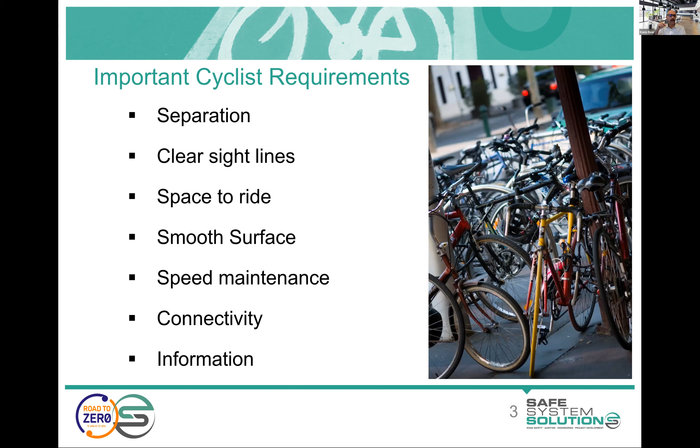Some ways of thinking for cyclists is: we want separation, clear sight lines, space to ride, smooth or consistent surface, speed maintenance - which is an interesting one, I'll elaborate on that a bit - connectivity, and appropriate information.

I like this statement - auditors need to think like cyclists. And as I said, the advantage is a lot of auditors are cyclists, or have been, so that ability isn't too hard. But thinking those questions like: would you feel safe using that road? What about if I turned here, would cars see me? Am I in a door zone if I rode there?

But cyclists, or as a lot of people prefer to be termed, people who ride bikes, come in very varied forms. It's probably the road user group with the most variation - we've got older people who ride, young people who ride, the lycra-clad cyclists, the training cyclists, utility style cyclists, and people carrying cargo on cargo bike style cyclists. It's a very varied group, which makes it quite hard to design infrastructure.

But I sort of resort back to thinking about this 8 to 80-year-old design philosophy you may have heard of. You design your infrastructure for use by an 8-year-old and an 80-year-old, and you really cover the bulk of your community. As I say, for cyclists, sometimes the 8 to 80 doesn't quite work, especially with the lycra-clad training style cyclists, but we'll get into that.

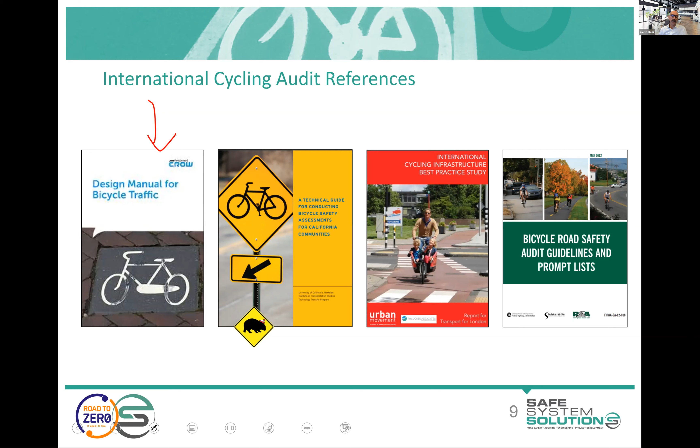And I certainly don't see it in designs anymore. I think the design community is fairly good at this—they design bicycle-friendly grates if they need to do their drainage in this way. So we're in a good position there.

But where I do see it is that a road upgrade is happening and there's existing longitudinal grates with no proposals to alter that, or existing roads and some are still there. We do sometimes see, for example, one that was very clear and important to find in an audit—they were creating pop-up bike lanes, that tactical urbanism approach, and claimed an area for a new cyclist route to connect, using pop-up infrastructure for that. But the new route they took had a longitudinal grate right in there.

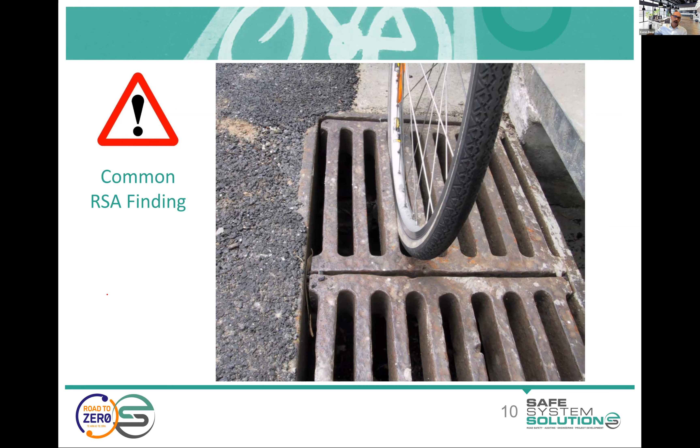So as a road safety audit team, we scratched our heads about this. We said, well, this is wrong—there's no ifs or buts about that, it's just wrong, you shouldn't do that. But then we thought, well, what's the risk? How do we come up with a risk rating on this?

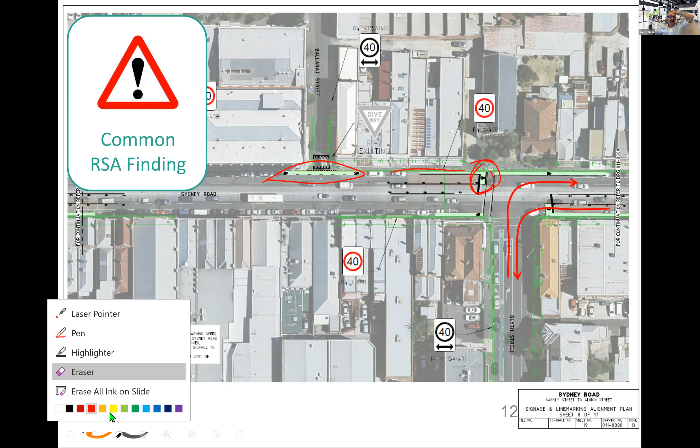I think the idea that somebody would miss a cyclist in that storage box and just plow them down isn't going to happen. I think there's maybe some possibility of drivers doing other maneuvers to get around, like driving around the cyclists there. There's certainly road rage going to happen—absolutely. Can I connect road rage to a road safety incident? Debatable. Anyway, so we ended up rating it at a medium.

In reality, it almost doesn't matter what we rated that—it was going to get changed. But we do like to have a think about that.

Okay, couple of questions that come in there. One's about where are those cycling reference documents? We'll have a look at that and let you know. I might check at the break to see if they're in there, or they need to be uploaded, or they may even just be hidden from you at this stage. Sorry about that if they're not immediately obvious.

How is it intended cyclist right turn from Sydney Road to Blythe Street? Great question, that's often a challenge on how you do that. So in this case, they either would need to navigate their way into the middle of the road to turn right, or cross at some sort of pedestrian facility and make their way there to turn like a car. It's a little bit hard, you'd also potentially put a hook turn facility in there so cyclists could come off and get a free run down there, which is a much nicer way to do it. Yeah, so no stop box for them.

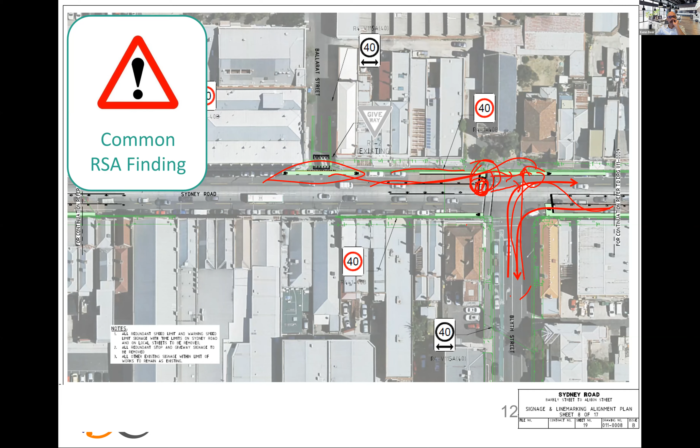In the UK, yes, and it's Wales. So Kez, I'll let you work out prizes on that one. You been to Wales, Kez? Yep, many times. Do you speak Welsh? No. What does that translate to? I haven't got it. Well, obviously, cyclist dismount. Obviously, yeah, that's right. Your Welsh is great, it's perfect.

So let me just read that other thing first. Left turn could be an issue with heavy vehicle. Yeah, that's a good point there, Hugo. Well done.

Back in the day, you used to see auditors and design teams looking down a plan like that to try and see how everything lines up and these sorts of things.

Now you can sort of just draw straight lines on your PDFs or CADs. This is going to cause side swipe crashes between vehicles, but it gets really messy when you put a cyclist coming through there as well, and we see lots of issues, with cyclists being more vulnerable and subject to trouble there.

So it's a hard one to make meaningful recommendations for. There are immediate recommendations you can do with RPMs - and note these are RPMs, not RRPMs. So they're raised pavement markers, not raised reflective pavement markers - just the domed ones to provide that specific line of travel.

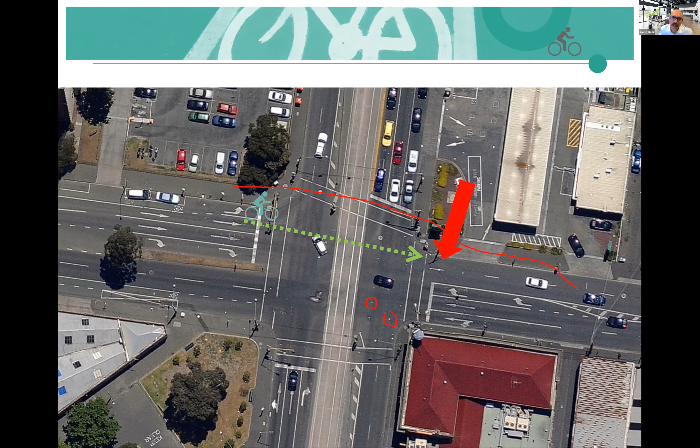A similar sort of challenge often arises where you've got cars and cyclists who come up here and cars coming up here. The cars are focused on trying to merge in and accelerate out, so sometimes there's just a bit of turbulence and conflict involving cyclists at these locations.

Roundabouts and cyclists - very interesting topic, and one where we got a very nice video and a prize-winning assignment, so you'll be able to have a look at that. In terms of design of roundabouts to try to better cater for cyclists, cyclists are overrepresented in crashes at roundabouts. Roundabouts are wonderful for passenger vehicle crashes, but we've had some trouble.

The old design guidance, the old thinking, was to say let's get this cyclist as far away as we possibly can from the traffic that's going through. It was discovered that this causes more safety issues than it does improvements in safety, because of two things.

One is that we get vehicles trying to overtake or pass the cyclist in a narrow area, and we get crashes associated with that. The second one is a bit more nuanced, and it's a bit more about understanding human factors. It's an absolute fascination of behavioral psychologists, part of that community.

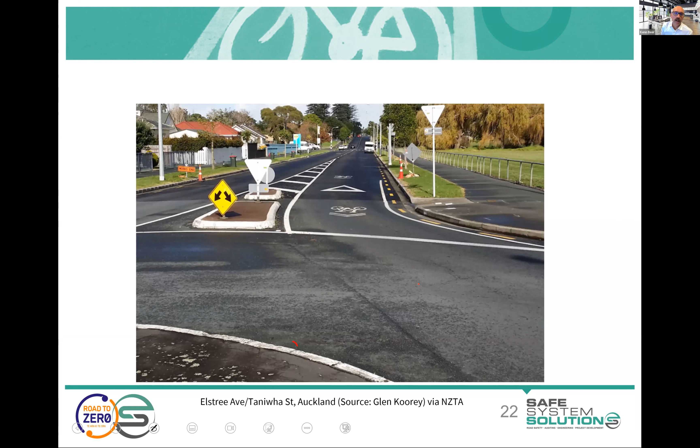So it's then marked with these things - prize for the person who tells me the name of that little doohickey. Sharrow - Simon's on that first, lots of people got it. It's a combination of the word 'shared' and 'arrow', saying that this is a shared space between cyclists and vehicles.

So that's the design guidance for these low speed single lane roundabouts.

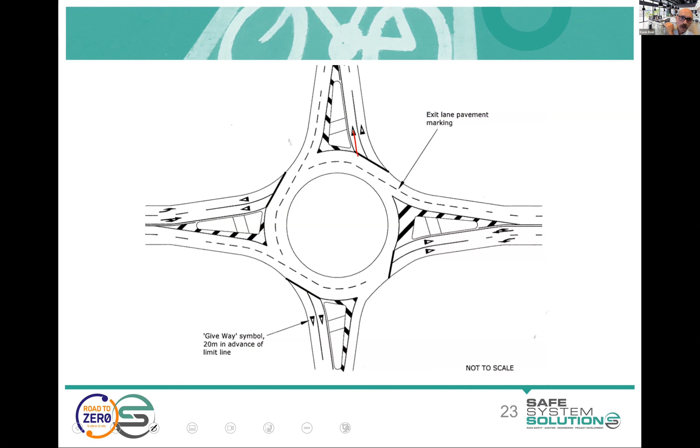I'll show you shortly what an even better solution is for this. Two-lane roundabouts have been very hard for a long time because you certainly can't be pushing a cyclist to claim the lane in these environments, given there's other lanes nearby. We have swept paths of large vehicles, and an inherent dynamic visual obstruction issue that often pops up with vehicles here. So really complex, and there are options to think about.

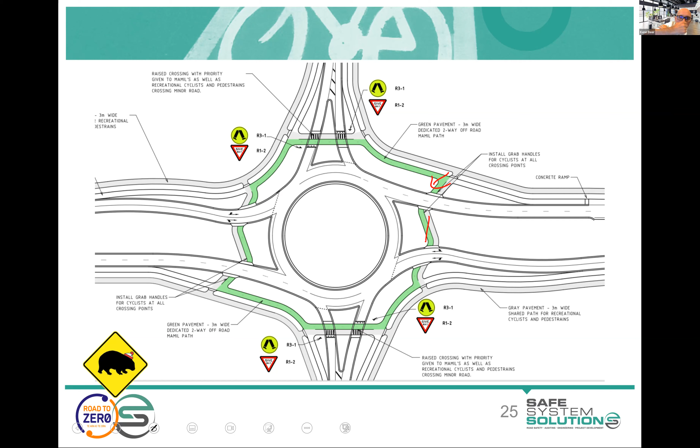Exiting your cyclist out of the circulating carriageway early, providing separated facilities. Here's some mock-ups. The Dutch are the general world leaders in all of this, and they would have possibly something like this, with underpasses. They would never try to mix a cyclist into a two-lane roundabout like that.

There's a question coming: any examples of this in New Zealand? I'm not aware of any. I know there's been interest and people looking at it, but if anybody does know of any Dutch-style protected roundabouts, as we call them, pop it into the chat. And of course, as auditors, we're thinking about cyclists.

Here's a really interesting one where cyclists have a protected approach, and the design added this extra element—the idea being that cyclists would come through here and have a little spot to pause, breaking up the journey. We scratched our heads for a long time at this design as an audit team, and liked the theory, but got quite worried about vehicles turning while cyclists were storing and propping. That was a big concern, especially with the volume of large vehicles and their tracking.

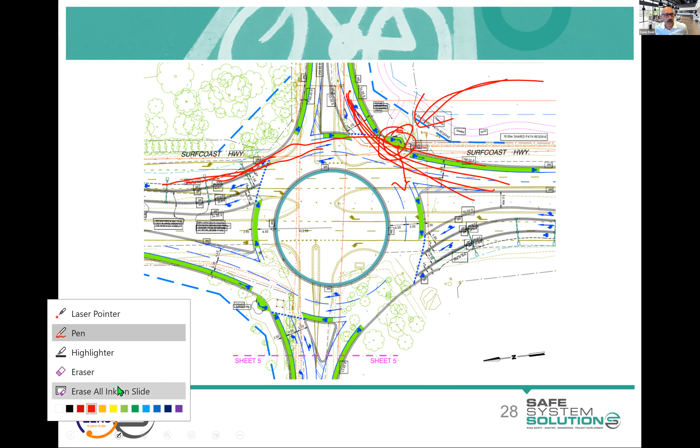Funnily enough, one of our designers called that the 'mammal pouch'—MAMIL being an acronym for middle-aged men in lycra, which is quite a popular training route here. That played into it, because the mammals often ride in packs, I have to put my hand up, I'm a mammal myself, I get out for training rides too. But because they move in packs, the pouch was kind of useless, since you could really only store one cyclist in there anyway.

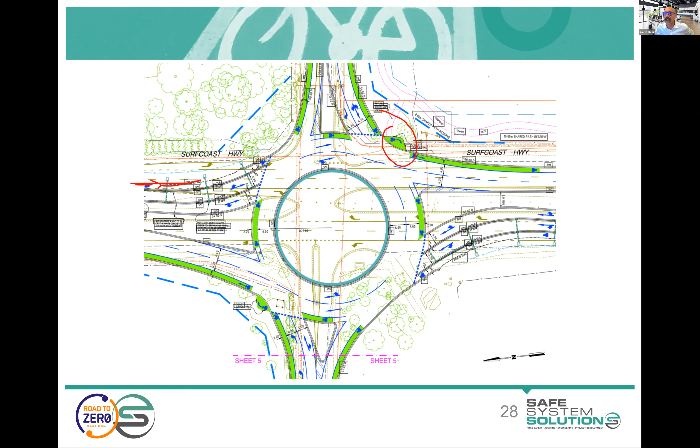Another example here—I'm just chucking in a few before our coffee break. Here was a design that looked really good. This is probably a case where an audit at design stage, followed by pre-opening and post-opening audits, is a good thing. You've got a cycle facility and shoulder, and then a separated cycle facility here, dedicated to cyclists, with a cyclists-only sign. You think, okay, great—they're taking the cyclists off the roundabout, giving them a nice run so they don't get caught up in traffic.

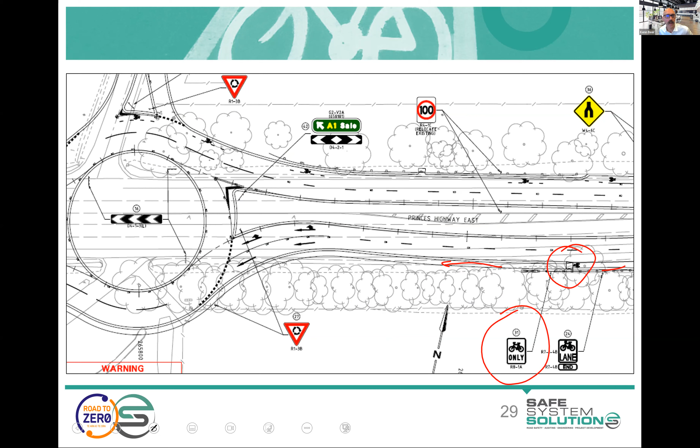You look at that and think, great, that's good. Then they built it, and we went to do the post-opening audit and thought, that's kind of confusing. As a cyclist, I'd ride up to this and think, oh, it's a footpath, I can't go up there—so I'd just battle it out in the roundabout with all the vehicles. There's a little cyclist-only sign, but I might miss that amongst everything else I'm looking at and watching out for.

But these are the things where, as a post-opening audit, there might be the ability to add just a little bit of green paint—that would have almost solved it, because it really draws you up there as a cyclist, doesn't it? And that's what that whole facility was built for.

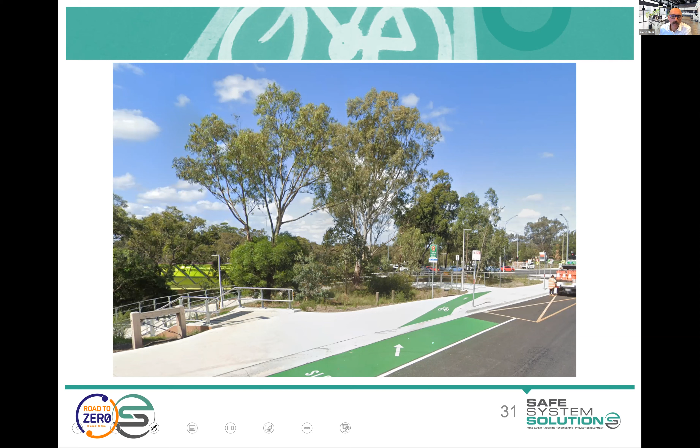So that's an example of using green paint for encouragement of cyclists in a specific direction. Green paint was originally proposed, or originally used, with its core purpose being conflict points—where a car could conflict with a cyclist, you'd paint that area green so an approaching driver is more alert to look for cyclists. Green then started to be used as more of an encouragement and guiding tool. Of course, it's green in some countries, blue in others, red in others—a bit of color confusion going on out there.

There's a lot happening in the chat here, which is good. I don't think there's anything for me to deal with.

Good point about cyclists complaining about the green paint being slippery. That's certainly an issue for cyclists and motorcyclists, and we don't want to excessively use paint. If we do, there are high skid resistance ways to create green, like omni-grip style or calcined bauxite style treatments.

Dooring's an issue that's always been there, but it got that label as dooring in the past ten or so years. This is where a driver opens their door in front of a cyclist, and we see serious injuries from the cyclist hitting the door. Most of the fatalities that have occurred around Australia and New Zealand associated with cyclists involve avoiding or hitting the door and falling into the traffic lane.

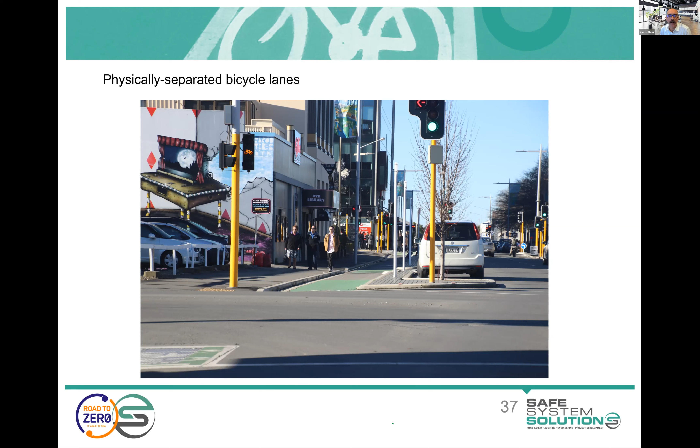Jenny's popped in a mention of the Dutch reach, which is a good behavioural technique to get drivers and passengers to open their door using the hand not closest to the door, forcing them to look back. That sort of stuff is great supplementary. If you can build this, you're eliminating the need to try to get everybody to do that, which we'd love everybody to do, but we know there's a challenge there.

The idea of cyclist pedestrian priority is a big thing now, and we see a lot of cycleways getting priority, which is really good. Here are examples of shared path facilities that take priority over the road, and there's some really intricate detail around calculating sight distances associated with this.

I just don't have time in this session to run you through that. If somebody's grappling with it, I can send lots of information, because you're thinking about approach speed of cyclists and vehicles, and which sight distance formula to use—are you doing gap sight distance or stopping sight distance? There's a bit to think about there.

But these are really good from a safety perspective, and also from an encouraging active transport perspective.

Interesting with this one—I popped something onto LinkedIn, one of our Safe System snippets, about this actual route. You go through this facility, it's beautiful, works superbly well, cars give way to you. Go through the next intersection, it's the same, and then the next intersection looks similar, but the priority is the other way around. You just sit there and watch all the cyclists go through with priority for the cars—you just want that consistency along a route.

So a number of common things you find: path widths, obstacles, hazards, horizontal and vertical alignment, surface issues, intersections. Here's one example.

So there's path-to-path intersection guidance, which looks like normal vehicle intersection guidance - priorities, good sight lines, advanced warning, sign guidance, 90-degree crossings, and that's to improve sight and reduce speeds.

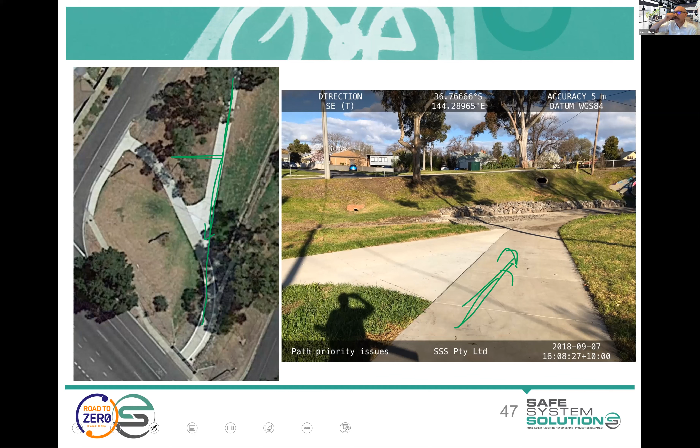Here's another example, and this one is actually kind of confusing because the actual path priority is for that one, but as you look at it on the ground, it looks like it's that one. So there's that confusion, and you actually have cyclists coming through on the main path going quite fast. If you had a cyclist or a kid coming down here, it really doesn't help from that perspective.

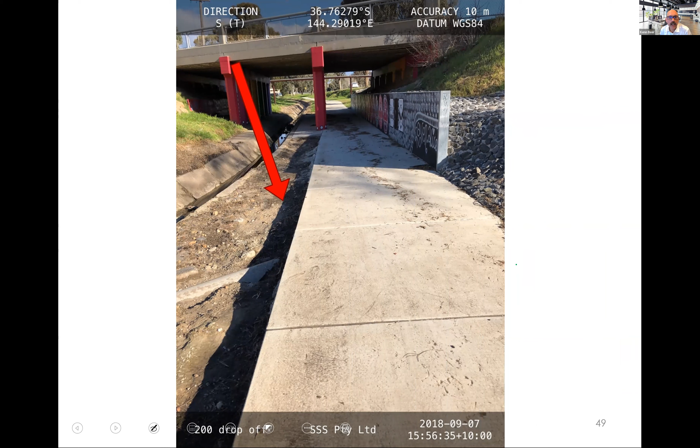Drop-offs, certainly an issue - even smaller drop-offs will definitely destabilize bikes. And you've got to think, on these shared paths, there's dogs and kids and all sorts of things. So cyclists moving along at even just medium pace, not really belting along, and a dog jumps out there, they can lose control.

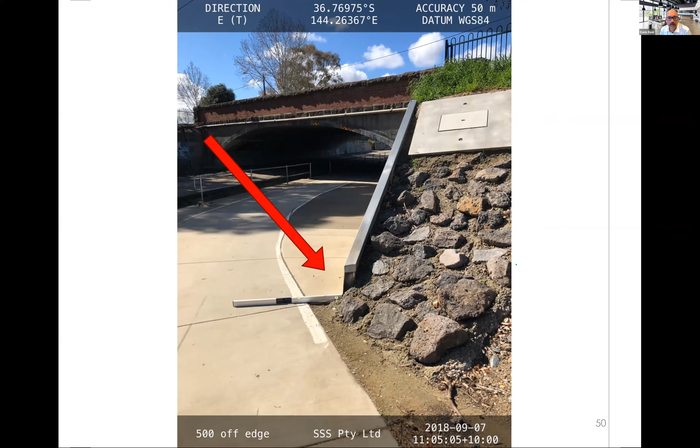And roadside hazards, the different hazards in there. Cycle facilities and bike paths are often in flood-prone areas because it's land that they don't want to build on, so we do see these times when there's lots of mud and debris and things.

Where's the guidance on cyclist-friendly fences? I'm pretty sure there's an Australian and New Zealand standard on cyclist-friendly fences, but I might have to look into that and grab it. Certainly the availability of cyclist-friendly fences is there, but you want to ask, okay, well, which one of these is actually cyclist-friendly? Just taking a note there.

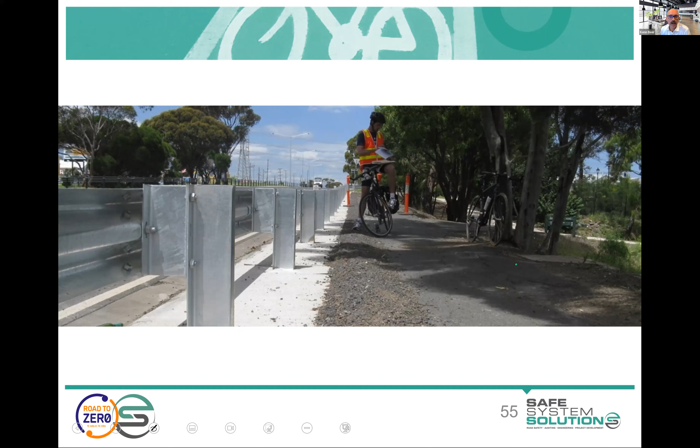However, we have the back of the W-beam system there, so if a cyclist deviates out, they'll hit that, and we have seen some serious injuries for cyclists, with local governments being held responsible for that because we're putting hazards in for the cyclists. So you can do back-to-back W-beam systems, and that certainly protects against some of that issue.

A good question came in there about the deflection area of the barrier. So that certainly is something to consider as well.

These are the old, what I would call a Type B or a G4 system, so they won't deflect as much as a flexible W-beam. But if you are using flexible W-beams, you'd want to think about that as well and try to get a bit of that buffer area.

A road safety auditor can provide a bit of assistance with that to a designer, because often you're so constrained in how much space you've got there, and you're going, well, if I provide all this buffer area, which is the deflection area, I lose lane width for the cyclists and pedestrians because I can't get into the property, and they're trying to balance that out.

So as a road safety auditor, that's where you probably consult with people who are real barrier experts, and they're talking to you about the way that the barrier works and how far it deflects. But then all of the things you can do to aid that.

You can tighten up post spacing to reduce deflection. You can understand that deflection is only at a specific point in time and at a specific direct angle of departure of a vehicle at a specific speed. And actually our test scenarios are very rare that they would ever happen on the road, and especially not in urban areas.

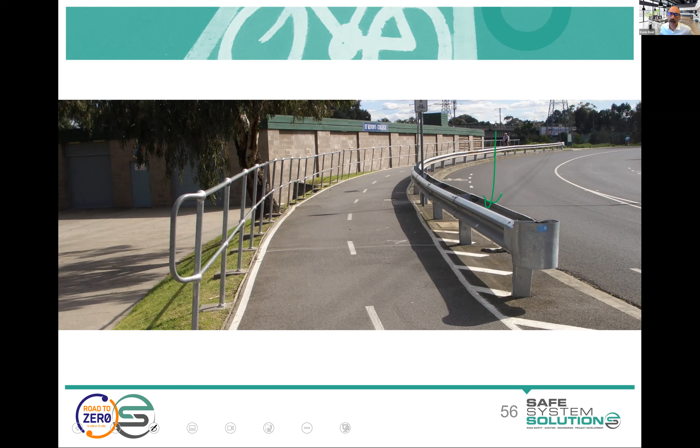Last couple of things before we take our break. This is the idea of putting hazards in a bike path to stop vehicles getting into areas, it is always seen as you're really creating a hazard for potential cyclists.

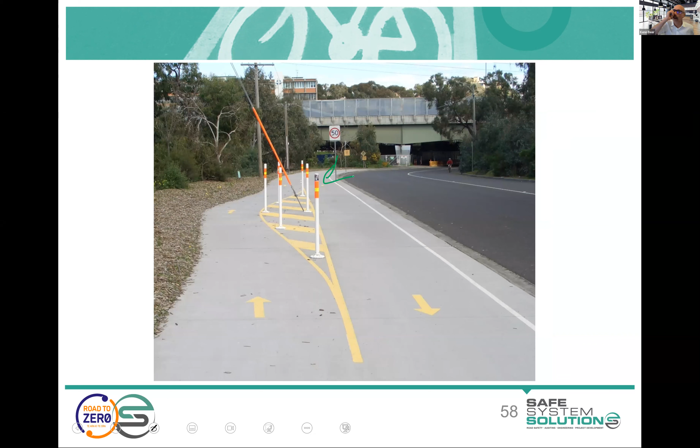These sort of ones are quite interesting, where you've got, this is actually, I think, pretty good practice. So the cable stay is in the middle of the bike facility. Ideal would be not to have the cable stay in the middle of the bike facility, but if you absolutely have to and you can't do anything about it, I think they've done pretty well. They've line marked it, they've got pre-warning, they've got flexible bollards. These are flexible, and I think that's a pretty good outcome.

So we talked a little bit about thematic audits, the theme, so a cyclist audit, you're getting out there on your bike and you're looking for all your things, your facilities. There's a fact sheet in Moodle that you can have a look at. I have a few little tips there.

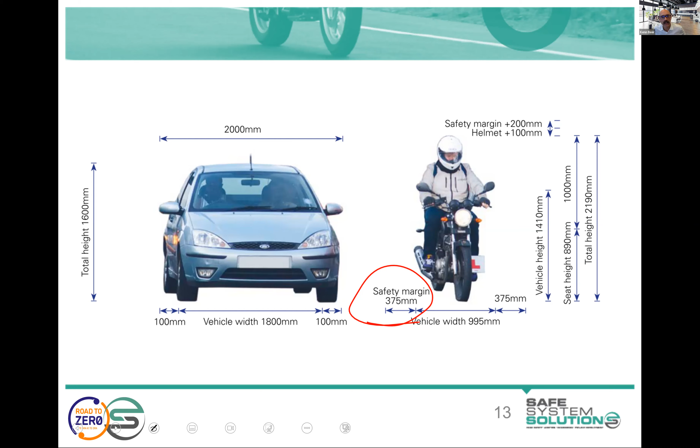Riders also need to be able to see what's coming up, to adjust and position themselves as all vehicles do. It's just that riders are more susceptible to these unexpected circumstances. So really good advanced warning signage is good, and if there's something unexpected coming up, you certainly want to be really good at signing that. Ideally, you remove what's unexpected, but if you can't...

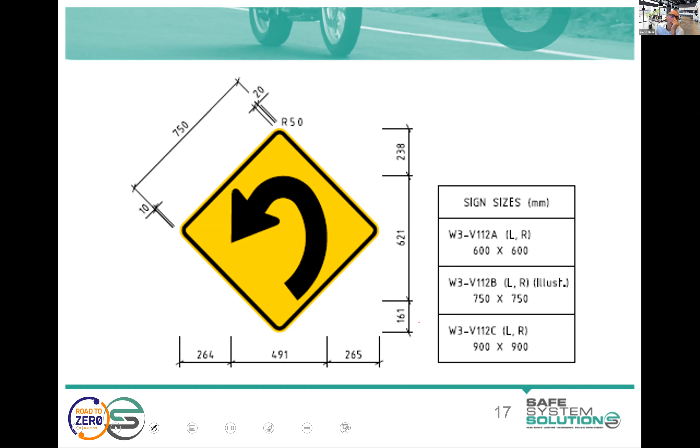This is a particular sign that was invented recently for the specific scenario where a curve tightens up. So the curve tightens, and that's sort of how that sign looks. I'll give a prize if somebody can tell me the technical name for a curve that tightens up. So you've got one radius... oh look at that, they're coming in nicely. Quinton, prize - compound curve. You've got one radius there, and then it tightens up.

Now, you've probably driven one in your time, or lots of them, and you're driving along, and then you go, that was a bit sharper. Well, the riders on that don't have the luxury of extra wheels and stability, and they end up on the wrong side of the road or into the roadside if it goes the other way.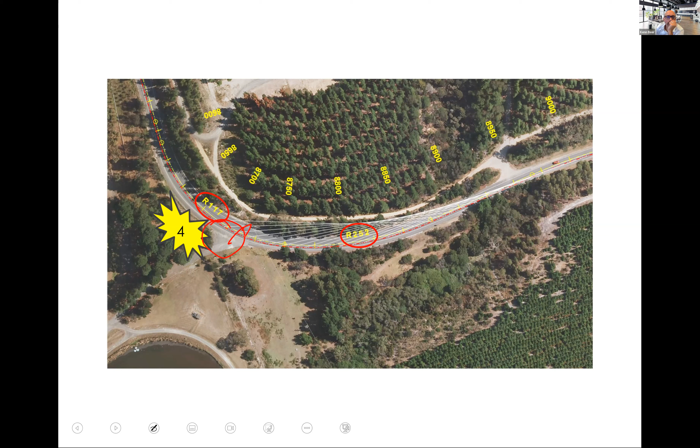Here's a real world example. You've got a 252 radius curve into a 117 radius curve, so that tightens up. And this is the site of four motorcycle run-off-road outside-of-curve crashes. It has a compounding factor of an unsealed road entering a sealed road, which means gravel wash will be in that area as well. But it's an interesting one.

Sightline challenges again. So you've got one vehicle turning from here, and one vehicle approaching from here, and queued traffic from a set of traffic signals. Motorcyclists could be either, but which one do you think is more often the motorcyclist, 1 or 2?

Yes, 2. Look at that, coming through beautifully. Hugo can have a prize, he was the first one to say 2, and 2's right.

Just because motorcyclists are easier hidden behind these vehicles, there's some minor and major things to address this, like signalizing this bit of intersection and connecting with the other signals. You can ideally get rid of the keep clear, but your traffic ops people might have some issues with that. You could raise this area to slow down, or even just pull back the hold line of the keep clear to open up better sight lines. Massive keep clear, this one, isn't it? Why have they got that?

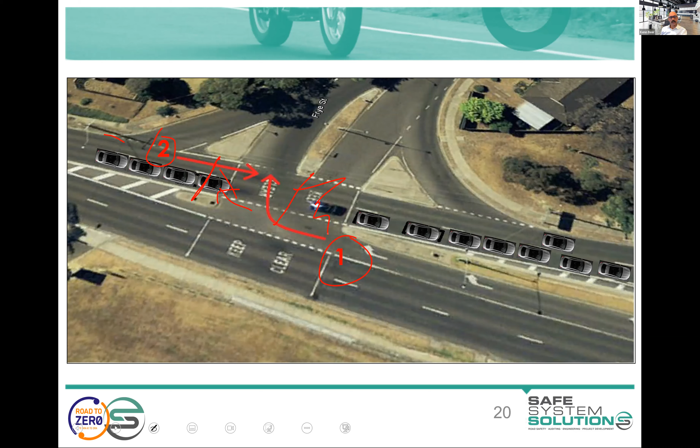Anyway, it's a common issue for cyclists in bike lanes, and vehicle to vehicle crashes happen all the time associated with this. But that extra protection of the vehicle to vehicle means there's far less serious injuries associated with these crashes for other vehicles. That's that site on the ground, just to give you an indication there.

You might think they're off the front of the pack early, and so we would like as clear sight lines as we possibly can. It's hard in some situations, I know. But things like thinking about the positioning of signal controller boxes, small landscaping bits and pieces, and your signage, where signage is, is all important.

So, surface - and we did have that question about line marking earlier. Motorcyclists and cyclists, to a degree, take this lean to get around curves and corners, and so the center of gravity is shifted out, and we have this outward force onto small contact patches.

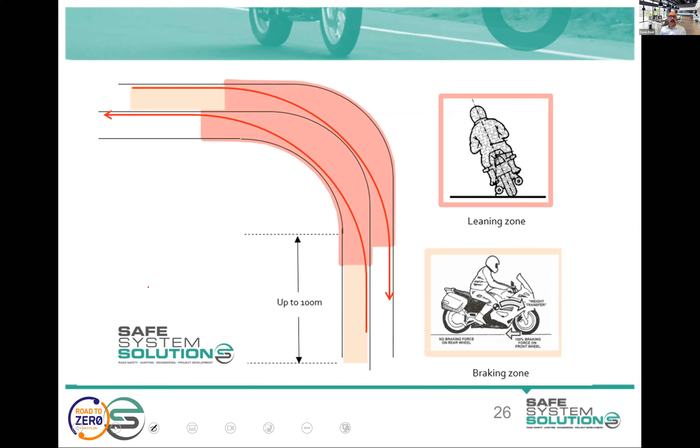So surface becomes this really important characteristic for these two road users more than any other. And the motorcyclist is called the canary in the coal mine when it comes to surface issues. The most important parts are on the approach to a curve and through the curve - once out, it's less important because they're not either braking or on that lean. So we want this consistent, good skid resistant surface.

Unfortunately we see all sorts of surface issues, and you'll be very familiar with them. Depressions can destabilize a rider - they're almost bouncing and can't keep traction, and their line will be altered. I did a fatality investigation not that long ago where it was a depression in the road like this in a curve, which destabilized the rider and their pillion passenger, and just bounced them into the oncoming lane, and they were both killed.

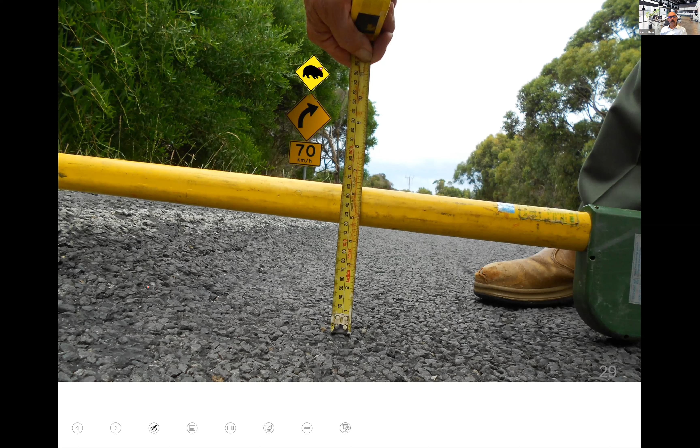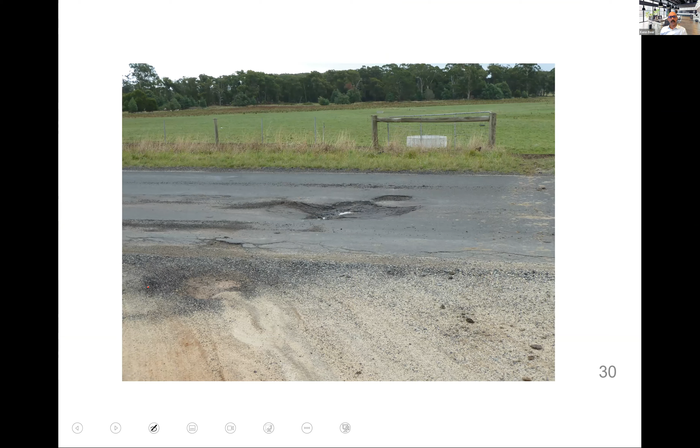Patching - just thinking about how patches are, where they are. Ideally we would have full width patching, so that the seams and joints aren't in the riding line, exactly where this one is. Yeah, it can be harder.

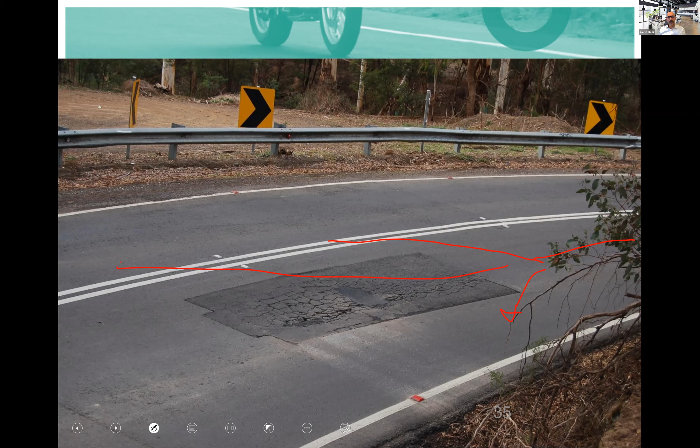Certainly if you do have pavement failures and the like, the really important thing is pre-warning, lots of warning to riders this coming up. This is a popular motorcycle route on a curve, and a rider, if they're coming in here, they're stuck on their line and their speed. Their real only option is to go the outside of this, or they might pull the bike upright to try to navigate through this, but that's going to force them onto the wrong side of the road anyway. There's really no ability to get to the inside of that for a rider that's got a line and they're traveling. So we need to pre-warn of all that.

Yeah, we still do see a lot of service lids or temporary steel plates put on the road network, which with a bit of water on that, becomes very slippery.

Again, you might look at it and go, well, it's pretty obvious, motorcyclists are going to see it, aren't they? Well, you need to get your head into scenarios of it's dark, the rider's following behind other vehicles, or the cyclist is following behind other vehicles. So there are scenarios where it may not be as clearly obvious as when you're out there as an auditor looking at it.

There's skid resistant surfacing and colours, if they absolutely must be there, getting them out of the road is ideal, and bolting them down really well is good. You can see there's some different existing permanent services in the road, pit lids.

They become problematic, a little bit generally, but extra problematic when you do a resheet and you've got a drop down to those, and they raise them, but that's often two completely separate exercises. I've seen pavement works happen, and then a year later they finally come through to raise up these features, and you're left with a big drop the whole time in between. So if you're auditing a design and they're putting service lids in the pavement, that's something you'd potentially want to suggest they move, if they can.

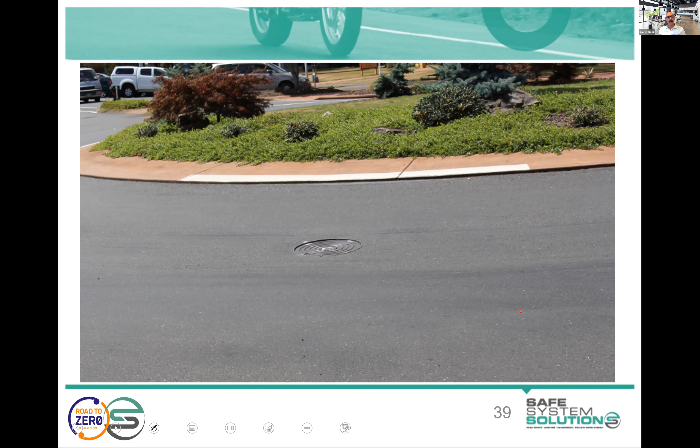And if they're existing, highlighting them with skid resistant surfacing. There's one in Rotorua in a roundabout circulating carriageway, so it's not going to be a good spot for a motorcyclist, a scooter rider, or even a cyclist, because they're likely to be looking around to navigate any vehicle popping into the roundabout, maybe not focusing on the surface as much, potentially on a bit of a lean. So ideally at the design phase of that roundabout, when they realise they need to put that in, an auditor suggesting it be extended out might come with some cost, but we'll have a better scenario.

So for surface skid resistance, we can use water blasting to improve it. You might suggest that if you're concerned, or use some different surface treatments - I don't have more pictures of those, but just trying to ensure we're providing that skid resistance for cyclists and motorcyclists.

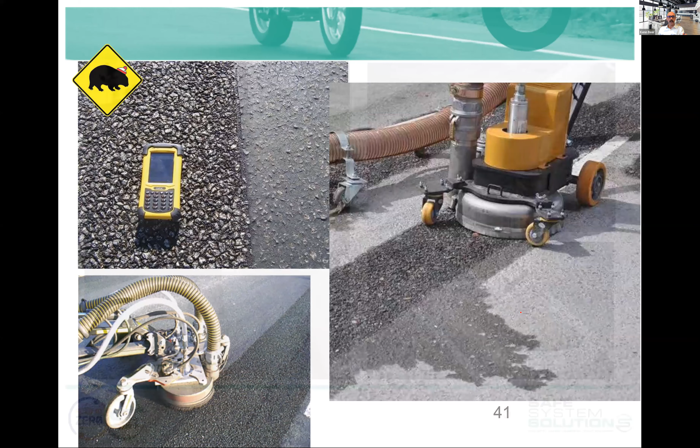Now, motorcyclists and curbing is an interesting one. We had a good assignment come in about barrier placement at curbs, but for motorcyclists at curbs, this is a point where a rider will be destabilized, and the more mountable the curbing, the better. It doesn't guarantee the rider won't be destabilized, but it gives them a chance if it's a mountable or semi-mountable curb. Where we have to use barrier curbing, we ideally highlight and make it contrasting so riders can see it - it provides good delineation as well.

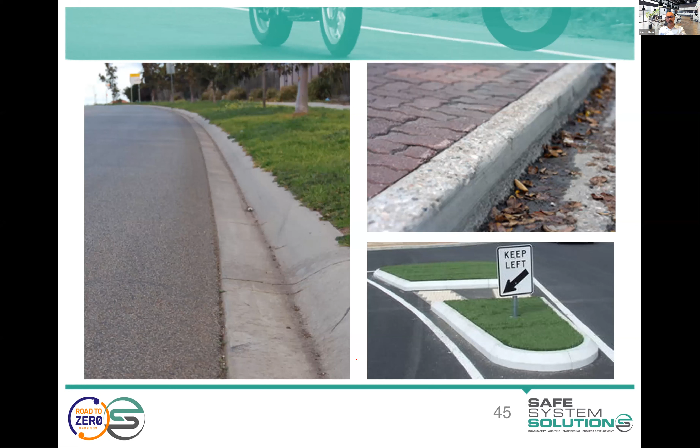Now, one thing I can almost guarantee, if you're a road safety auditor doing lots of road safety audits or safe system audits, at some point you'll get a design with a large stop sign or give way sign painted at an intersection on the pavement. It basically plays out this way: they've got an intersection with an overshoot crash problem, people keep missing it. They've done some advance warning signs and other things, there's still a bit of that happening, so they're thinking, what else can we do? Okay, let's paint a big stop sign here to warn, right at the point the vehicles will stop.

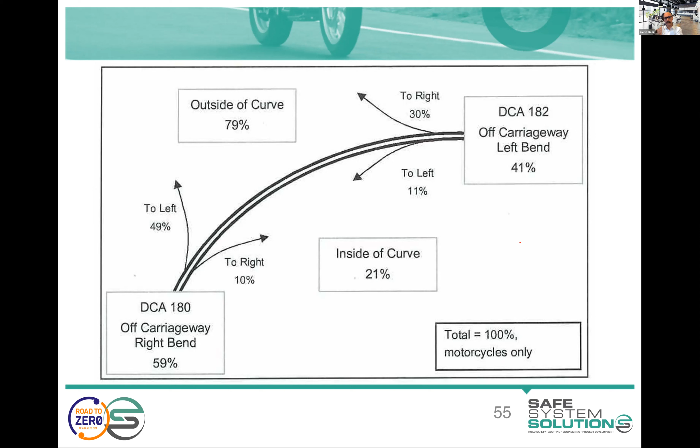Now riders leave the road. I got a graduate to do this at one point - a heap of motorcycle crashes on curves, and just plot where they go. Probably kind of obvious, but most of them go to the outside of curve. We've got 21% to the inside of curve. Crashes with passenger vehicles are a little bit more, closer to 50-50, a little bit more to the outside of curve, but the overcorrection comes into play with passenger vehicles - they'll go too fast into a curve and then overcorrect as they leave, and we see inside of curve crashes a lot more.

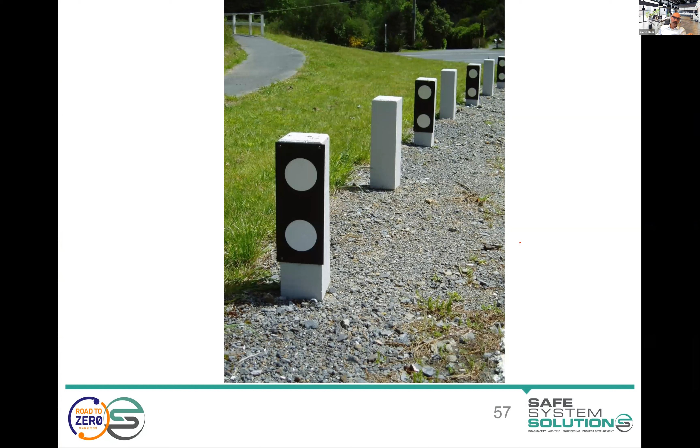But we do see a bit of this sort of stuff out there, and this is the Coromandel area, which is obviously a popular motorcycling area, and we've got surface deficiencies, and we've got outside of curve. We've got these concrete blocks, which I'm not 100% sure what their purpose is - I think for delineation, but I think it's more for trying to stop vehicles getting to that shared path if they leave the road, but not a great way to do that.

A galvanized steel post will kill a motorcyclist, no worries. It's deemed frangible, but that's for cars. We've seen motorcycle deaths and serious injuries from signposts. We're working with a couple of universities on trying to get a frangible signpost that can go above about this height and still stand up to wind load and shear within an acceptable level for motorcyclists. It's a bit of a complex engineering challenge, but it's a bit of fun.

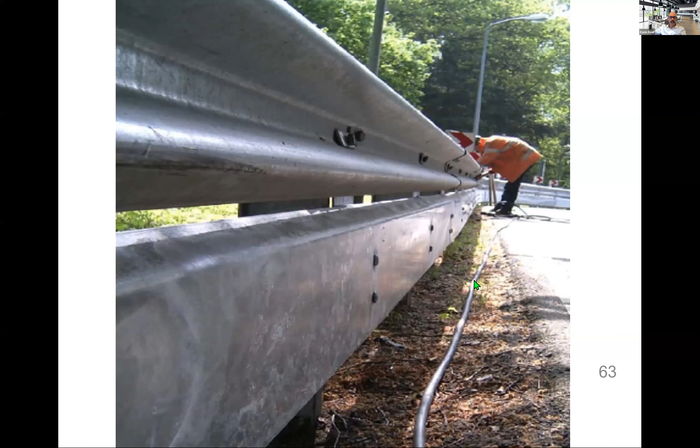One of the things we know is the idea of underrun protection. I call it underrun protection, not rub rail. Rub rail is a specific type of underrun protection, and this one actually is rub rail. But you can get proprietary products available with different proprietary barrier systems. Ram Shield has Bicamate, EasyGuard has MPR, and Century Barrier has - can't remember the name of it - Rider Pro, I think it's called. Anyway, they're all underrun protection.

The idea is that if a rider was sliding and hit one of these posts, they would be in serious trouble. If underrun protection was there, they'd be in less serious trouble - not saying it would be friendly, but they would slide along it. So if you're doing an audit of a popular motorcycle area, or concerned about motorcycles leaving the road and hitting the barrier system, you'd recommend underrun protection for the barrier system, suggesting a retrofit for existing barriers, or factoring it into consideration for a new barrier system implementation. I had that video going, which we won't do.

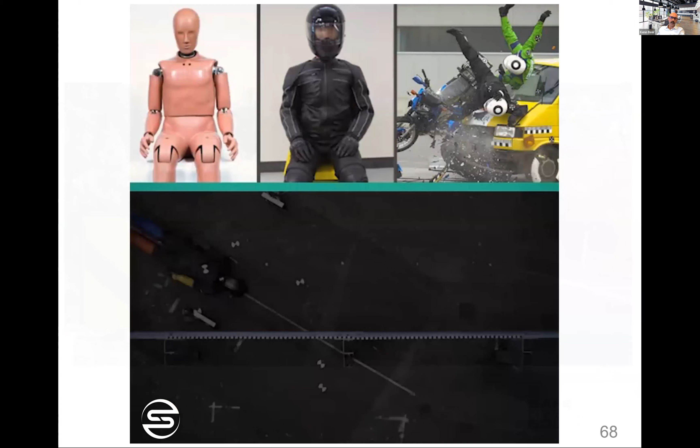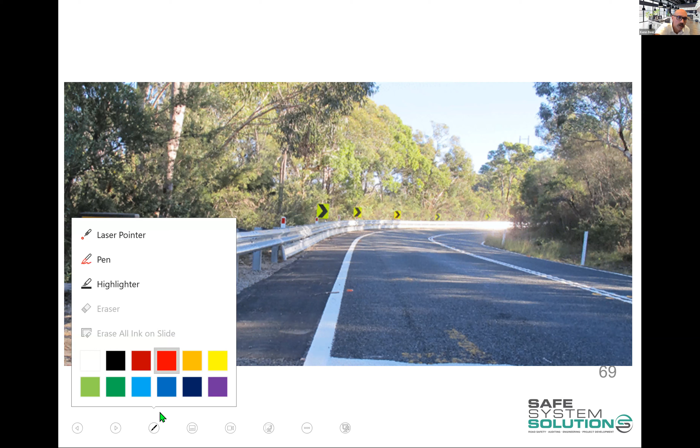Why do you think it's ended at that point? Why has it ended there? Anybody got any ideas? Okay, so I think Jubin's saying it's the outside end of the curve - the terminal end is what we were looking for. So maybe we'll give a couple of prizes there, Kez, first people who said terminals. And yeah, it's the end terminal of a barrier system.

A colleague and I run a 3-day barrier design training course, and we really get into what is an end terminal, how does it function, what are your design specifics, what types of end terminals are there. There's so much in it, but the message is that you can't add anything to those end terminals because it hasn't been tested in the 8 tests you need to do with cars crashing into these at different angles, forward and back, to ensure it's not going to cause issues for a vehicle that leaves the road and hits that. We don't want it to spear through the vehicle or stop the crumple of the end terminal. They're very specifically designed, so if you see things connected to those, it's a bit of a flag of concern.

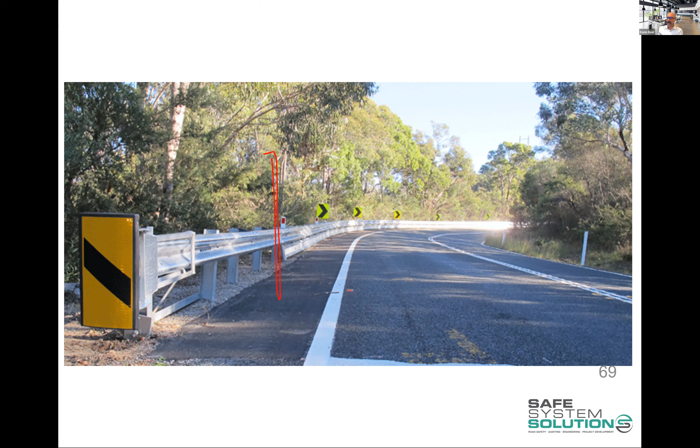Now, road safety barrier and motorcyclists is often a topic of interest. Some motorcyclists still hold on to the impression that this is somehow the most dangerous thing out there for motorcyclists. It's not the case. A motorcyclist will certainly be in trouble if they hit this at the base. If they hit the wires, they'll go over the top of it - they're not going to get sliced up.

Where the motorcycle community probably has, or some people have, a reasonable argument, is that there's nothing really good to retrofit to this. But their whole argument is kind of flawed, because we don't use this on popular motorcycle routes or areas, and it's predominantly because you can't.

In terms of a physical sense, this is a barrier in tension. These are wires that you tension up at the ends of the terminals. You put that on a popular motorcycle touring route like the Coromandel, or Rimutaka Hill. Okay, so that's how the road looks from the top.

I want to put a barrier in tension on this. What do you think it's going to do? Well, the post will just bend and the whole thing pops in, you can't do it. So 200 meter minimum radius, absolute minimum radius for your wire rope on a curve, because it just can't handle it otherwise.

But you've got to have a few of those. We have used and trialed these post protectors. This is your rugby goal post padding, essentially, around each post. It's not a great solution.

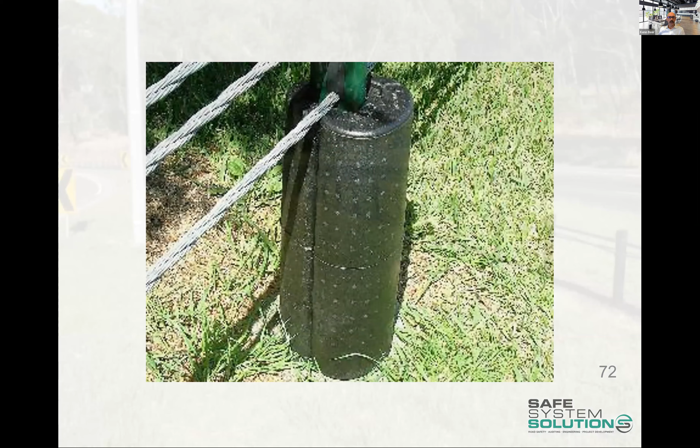I have used it in my designs before, once or twice, but really, between you and I, it was in order to get the barrier through, and it was essentially a PR exercise. Basic 101 fundamentals of physics says this is not going to be a good solution. You're going to try to manage the energy by cushioning it.

Like the underrun protection, they roll along it. You're dissipating energy over that distance, as compared to this one, where you're dissipating it over time, you're just cushioning it a bit. It works okay when we've got rugby goalposts and the like, because you're kind of at your threshold of energy running into stuff. But this, we're talking about speeds well beyond that.

It does something at some particular crash, but in general, it's not. But that was back in the day when I used those, where we had a choice between a traditional W-beam guard fence or a wire rope safety barrier. There was no flexible W-beam system, right?

So what you've got there is a barrier system that is kind of bad. It does some things, like this W-beam, old type B G4 system. And you've got a wire rope system, which is highly flexible and an amazing feature for passenger vehicles. So I do everything I can to get this wire rope system in, because I know how much protection it provides for the bulk of the community.

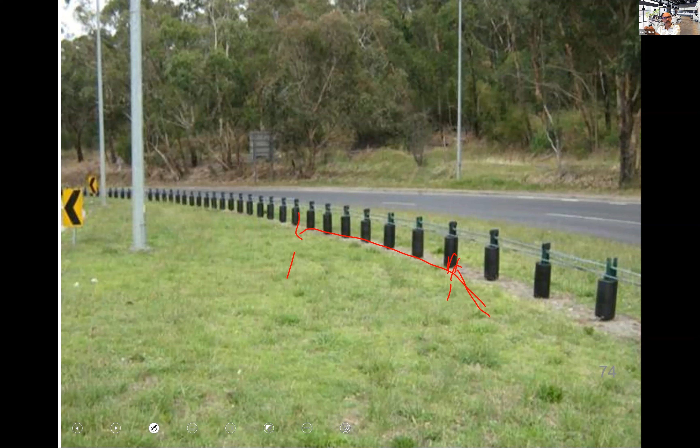The motorcyclists were getting angry, but you knew this is the better facility overall. Nowadays, I would never put these post protectors in, because I would just change the barrier system to a flexible W-beam system with underrun protection. Safer for motorcyclists, still an absolutely fantastic barrier system for passenger vehicles, and everybody wins.

I'm going to keep moving on. There's particular implementation, just look at the standard drawings of how these sorts of things go in. I mean, that's just wrong. You don't attach it to the post. You've got to separate it out, because you've got these different gaps and sharp bits, and legs and arms can go through these areas. So again, thinking about gaps, thinking about what you might be running riders into.

But I won't spend long on these.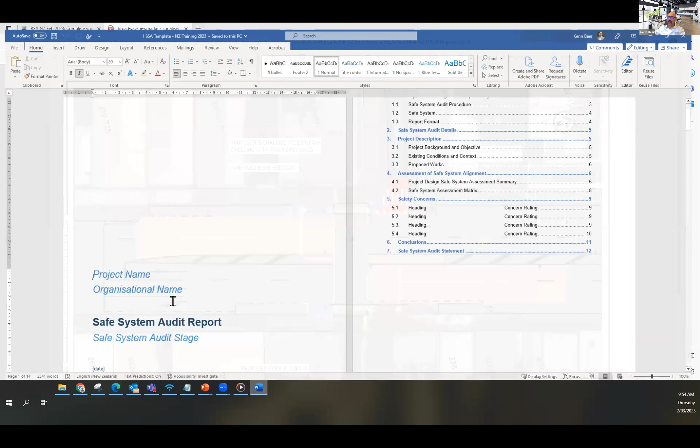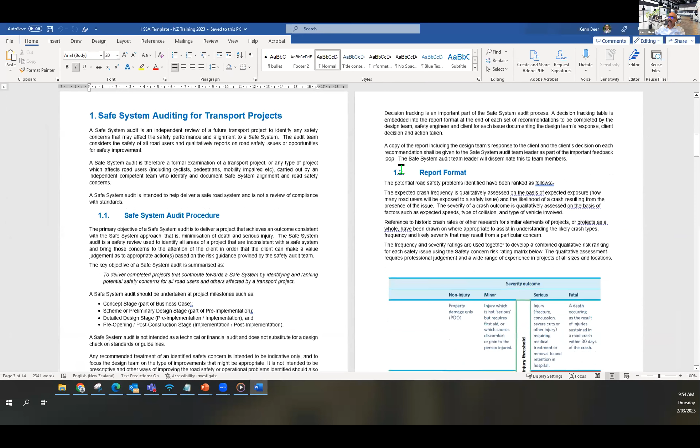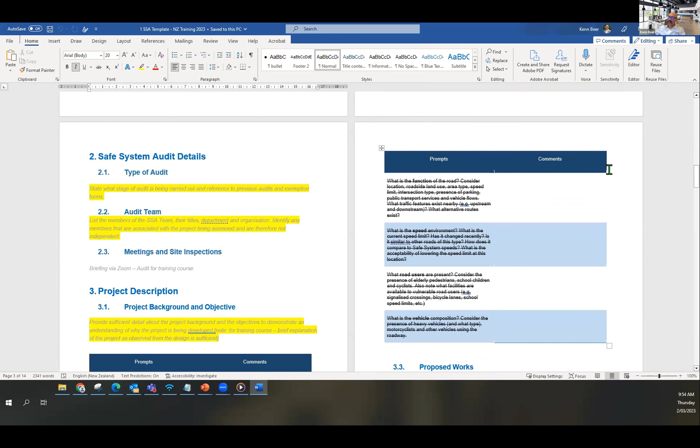Anything highlighted in yellow is for you to fill out as part of this assignment. Anything that's crossed out like this, you don't need to fill in. You don't need to fill in this.

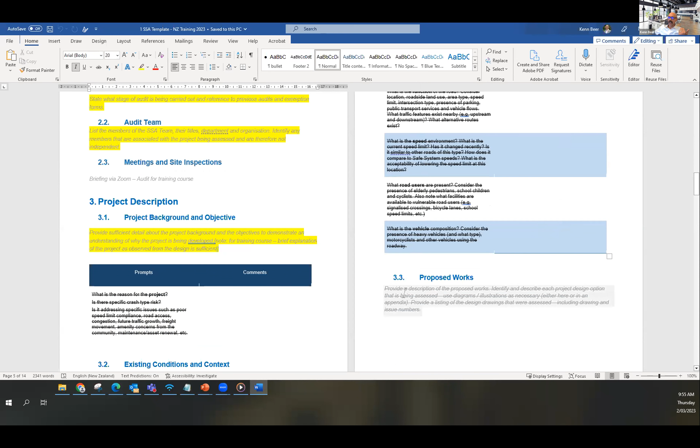These are things around the safe system assessment framework that front load a safe system audit. Now, we haven't taken you through the methodology for this. You can have a look at it yourself and get your head around it, or the safe system assessment course covers this. I'm not going to get you to do that.

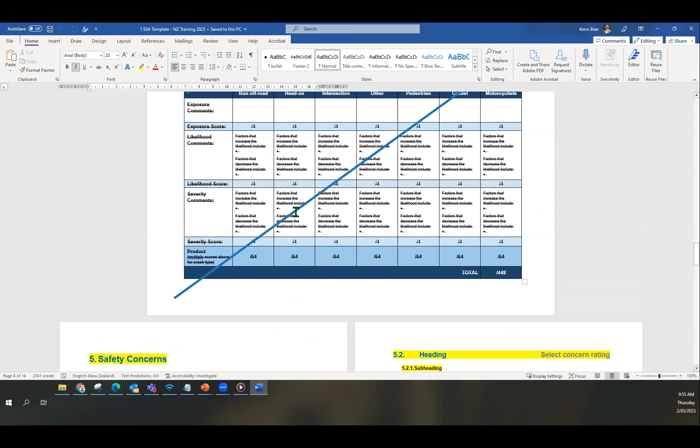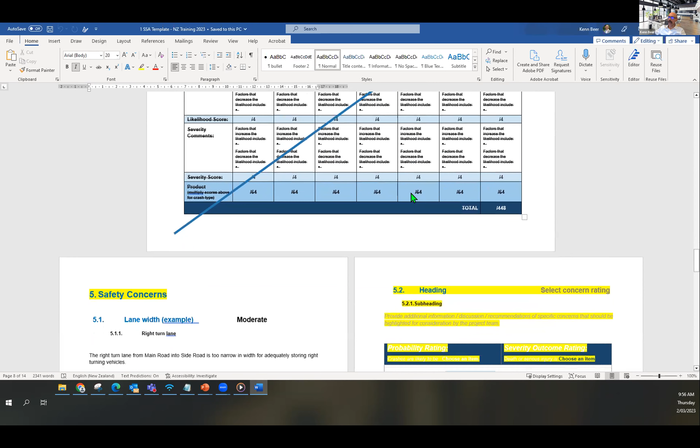Anatol made a point there - presume we don't do safe system assessment, should it be a road safety audit? Yes, that's exactly what I'm showing here. We've crossed out the safe system assessment part of this because you haven't been taught that methodology yet. Some of you probably have been to the other course, so you'd be able to do it. But for this assignment, we don't need you to, and we don't want you to, in fact.

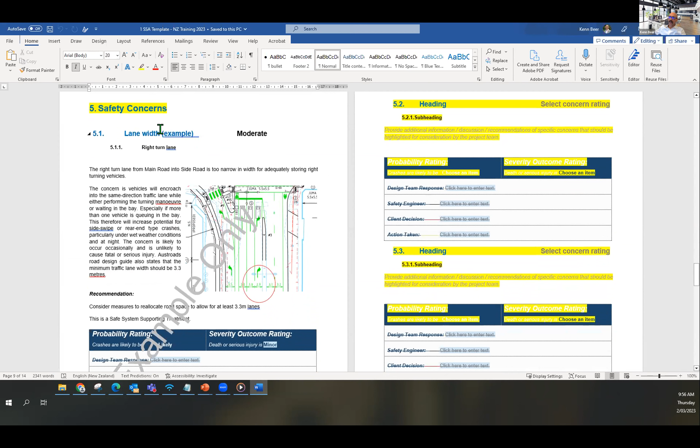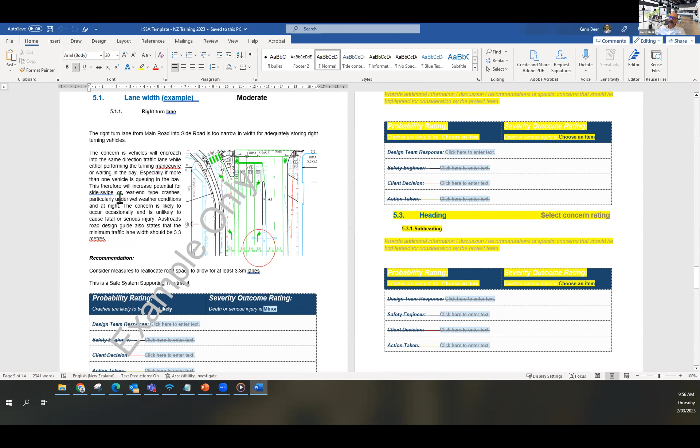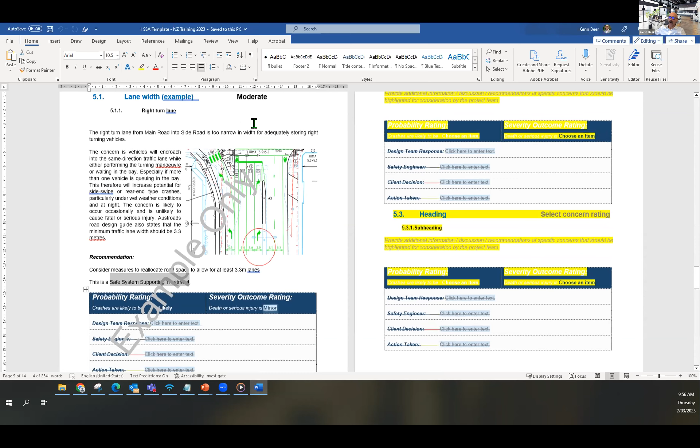All you're going to be marked on are 3 findings. So here's an example - that's what we want to see: a snip of the design where you're talking about, maybe a markup, written up recommendation, safe system supporting treatment, risk rating - likely, minor, moderate risk, using the risk table. You have to do that for 3. One, two, three, that is it. Some of you will find 25 issues. We only want 3.

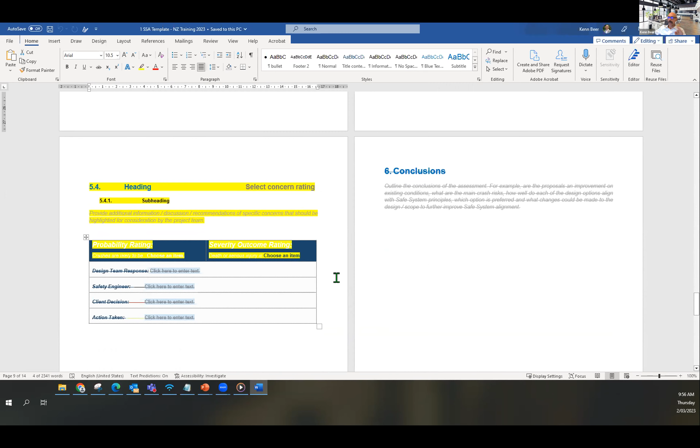Don't need to write us a conclusion. You just fill this out, and we want you to sign it. You can be a road safety auditor in training, or safe system auditor in training, or whatever you want to put, or anything there. But for official audits, you sign them, so we want to practice that.

The last thing we want is a picture of you at your site to prove that you went there. Because that's one of our requirements in this course - that you go to a site, you look at it, you understand you're looking at a design, something in the future, and you're looking at the existing road and imagining it there, and it's part of the audit process.

So then you do all of that, and you go back here, and down here there will be an upload - you PDF it and upload it, and that's what you want.

Now, like this group, if some of these people know each other and they want to do this as a team, we are okay with that. But you absolutely must write that into this where you say, list the audit team members. If we see 2 identical reports and we haven't got those listed there, you won't pass. But you can do that if you want to work with others.

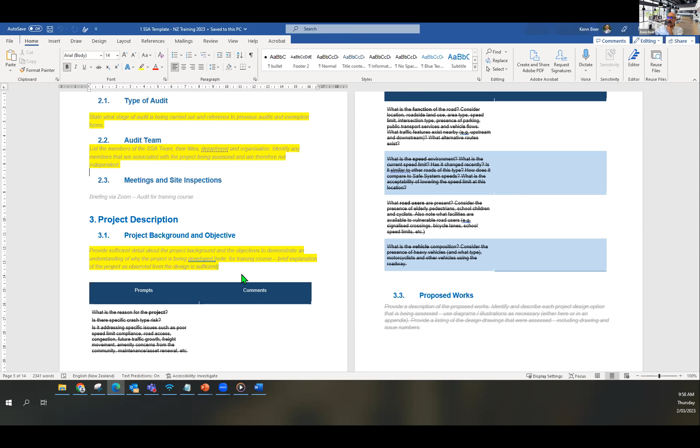So you've got to be safe out there, follow that safe work method statement, find your design, audit the site, go to the site, take a photo of yourself out there, imagine how it's all going to be built, what are the crashes that are going to happen in the future, not what's the existing failures. Some of those existing failures may continue through to the design, and then you can report those.

Yeah, a lot of wombats today, that's right.

So any questions on what you're going to need to do? When's it due? Well, you've got 14 days and 7 hours. We're giving you a bit of time on this. Now, if you're struggling to find issues in these, or you're struggling to get your head around this, get in contact with us. We can have a one-on-one chat, get you some time with one of our senior auditors who can explain all of this. But this is the big assignment of the course.